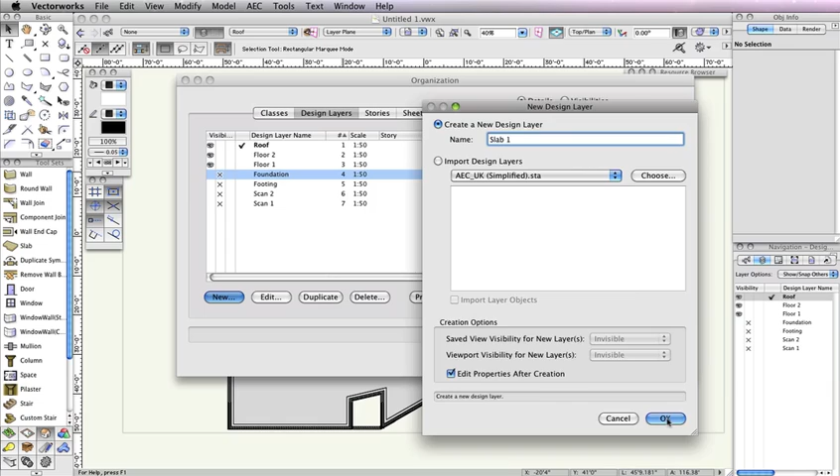Go to the Design Layers tab in the Organization dialog box and select Design Layer Foundation. Then click the New button. In the New Design Layer dialog box, name the design layer Slab 1. Check Edit Properties After Creation and click OK. In the Edit Design Layers dialog box, set the elevation and layer wall height fields to 0, then click OK to create the design layer.

You need to create one more design layer for the second floor slab. To do this, select Slab 1 and click the Duplicate button. This will create a new design layer, which you should name Slab 2, stacked directly below Slab 1. This slab should actually be stacked between Floor 1 and Floor 2.

To change the stacking order of the design layers, click and hold in the digit located to the right of the design layer name in the number column. Then drag your cursor upward until a bold horizontal line appears between Floor 1 and Floor 2. Now release your mouse button. As you can see, Slab 2 is now stacked between Floor 1 and Floor 2.

Aside from the stacking order, you also need to change the elevation height for Slab 2. So select the Slab 2 layer and click the Edit button. When the Edit Design Layers dialog appears, input 10 feet 8 inches in the elevation field and click OK.

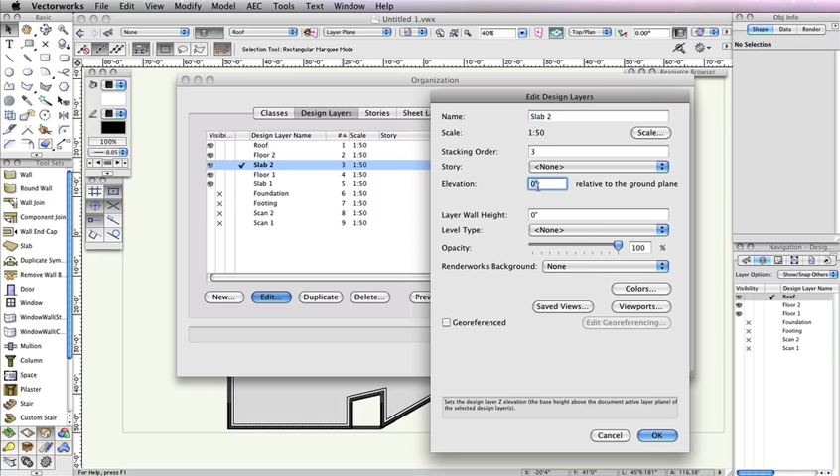Next, set Slab 1 to be the active design layer. Now make design layers Scan 1, Slab 1, and Floor 1 visible. All other layers should be set to invisible. Click OK to close the Organization dialog box. Finally, go to View, Layer Options, and choose Show Snap Others.

Now we're ready to begin drawing the slabs.

Just as you did with the roof objects, you'll first create the shape with basic 2D geometry and then convert it to a slab. To begin, go to the Attributes palette and select any shade of tan for the fill color. To do this, simply click on the color swatch below the paint bucket icon.

At the bottom of the color picker, select the Vectorworks Classic color palette, then select a color. Additionally, in the Attributes palette, click the Opacity button, which is just below the pen color swatch, and set the opacity slider to 50%.

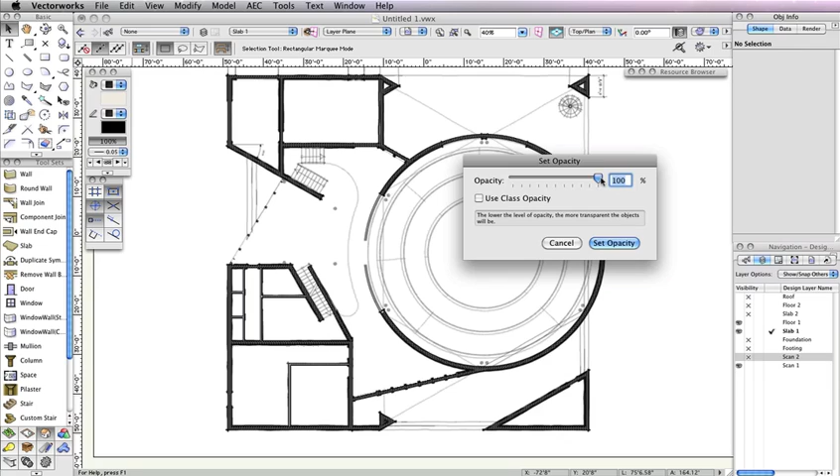Now select the Rectangle tool from the Basic Tool palette. Also choose the first mode, Rectangle mode, in the toolbar. After that, click at the top left corner of the building, where the horizontal and vertical walls meet. Then at the bottom right corner on the opposite end of the building, click once more to create the rectangle.

Notice you can still see the walls beneath the rectangle, since we set the opacity for this rectangle to 50%. You'll also notice that the rectangle extends past the building walls near the building entrance.

Let's take a second to fix this. Again, select the Rectangle tool in the Basic Tool palette, but this time choose the last mode. Now you'll need to use the scan of Floor 1 to snap to the point where the window wall at the entrance and the horizontal wall below that window wall meet.

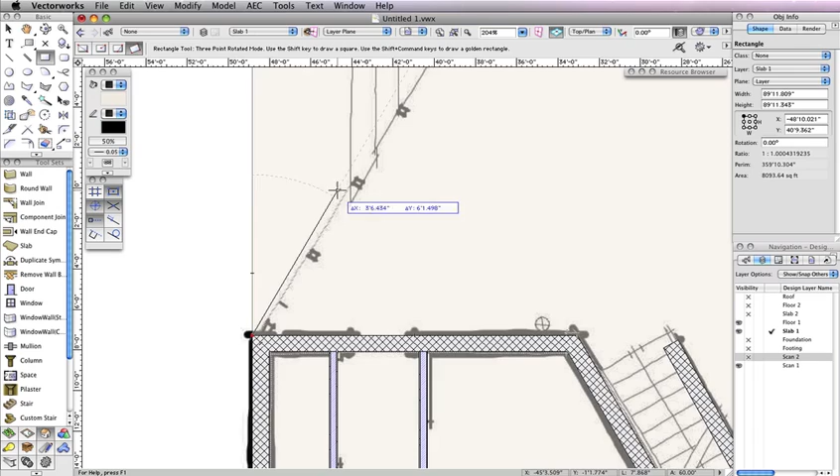After locating this point, click to set the first point of the rectangle. The second mouse click will set the rectangle's angle. So move your cursor upward and slightly to the right until you reach the angled wall above. When you see the cursor cue Object/Perpendicular, click once to set the angle.

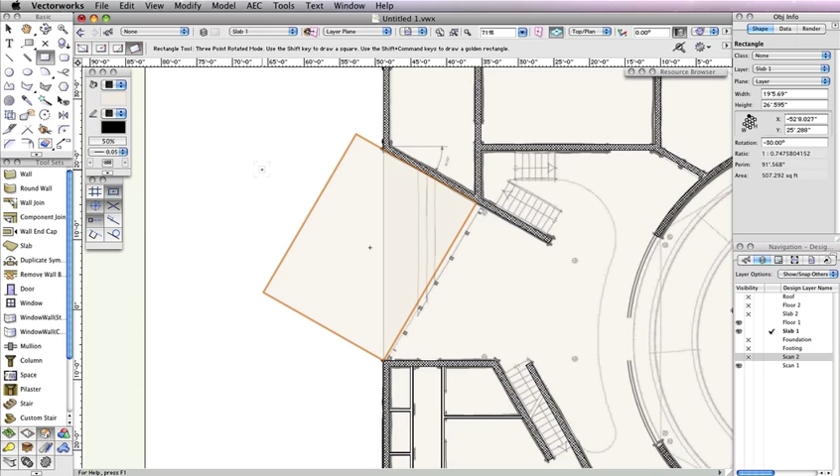With the last click, you'll set the rectangle's width. So move your cursor to the left until you have passed the leftmost vertical wall of the building, then click to create the rectangle. You can use this newly created rectangle to clip a section from the larger rectangle you previously drew.

Hold the Shift key, and with the Selection tool, select both rectangles. Next, go to Modify, Clip Surface.

Initially, it might seem as if nothing happened, but if you press the Delete key to remove the small rectangle, you'll see that the clip was successfully completed.

Additionally, if you select the larger rectangle, you'll notice in the Object Info palette that the object has been changed to a polygon. You'll also need to clip the area inside of the round walls from the existing polygon.

To do this, select the Circle tool from the basic tool palette, and make sure the first mode, Circle by Radius mode, is enabled in the toolbar. Then, to start the circle, click at the center of the round walls when the cursor cue Arc Center appears. To complete the circle, click anywhere on the inside face of the round wall.

Next, with the Selection tool, select both the circle and the remaining polygon.

This time, right-click the circle and select Clip Surface from the context menu. Since the selection state has changed, only the circle is selected. Press the Delete key to remove the circle. As you can see, the proper clip has been created.

We're almost done creating the slab. Now we need to clip a few more extraneous areas before we can complete the polygon that will be used for the slab. This time, we'll use the Clip tool as a different approach to clipping objects.

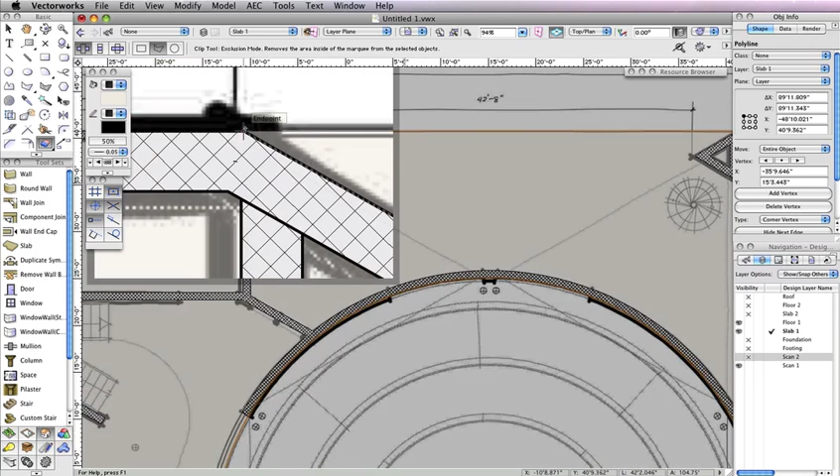There are only 3 vertex points along the inside face of the walls that need to be exact for the clipping boundary you are creating. Please click on these points in the same order as shown. Then, for the remainder of this polygon, simply set the points as close to the same area in your own drawing as possible.

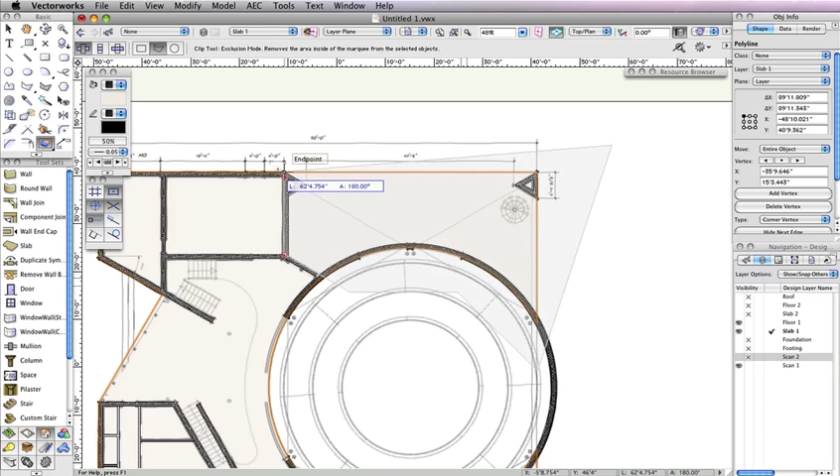The last click to create the clipping boundary will be the same as the starting point. Once the last point is set, the polygon will be clipped according to the shape you just drew.

Let's use the Clip tool once more to clip this bottom portion of the polygon. Again, just follow the order used here to set your own points for the clipping boundary.

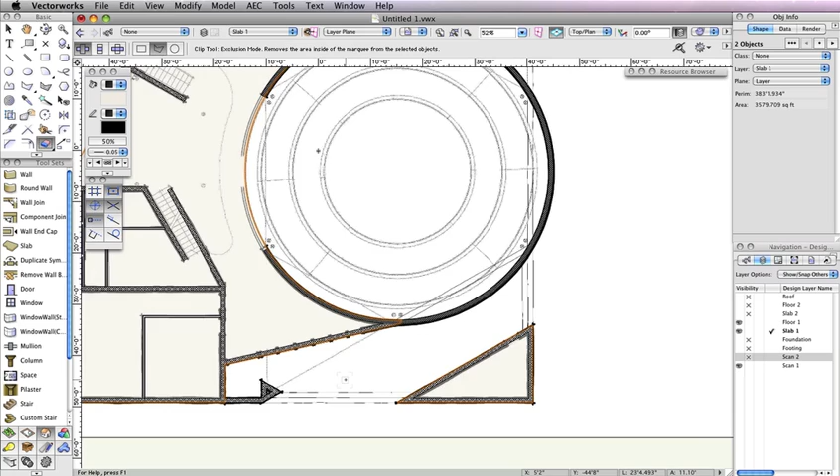Remember that only the points along the walls need to be exact. The rest of the points need only be relatively close to the area shown here. Just as last time, your start and end points should be the same point. Once we've completed it again, the polygon will be clipped accordingly.

Notice in the Object Info palette, because of the way the polygon was clipped, there are 2 polygons instead of 1 now. Now you're ready to convert these polygons into a floor.

To start, switch to the Selection tool. Select the larger of the 2 polygons and go to AEC, Floor. In the Create Floor dialog box, set the bottom Z field to -12 inches and the thickness field to 12 inches. Then click OK to create the floor.

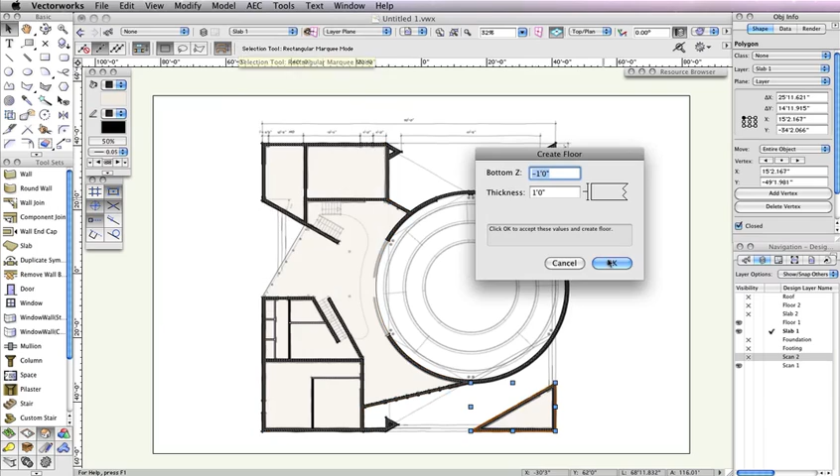Notice in the Object Info palette that the object is now a floor. Next, you'll select the smaller polygon and again go to AEC, Floor. Use the same parameters as before and simply click OK to create the object.

Creating the lecture hall slab. The last portion of the slab that you need to create for this floor is the auditorium or lecture hall. Here's what that floor in this section looks like.

Each level is 1 foot 6 inches higher than the level before it. This is so the people on each level can see the presenter or lecturer in the center of the floor. Therefore, instead of using the floor command as we did before, we'll create a sweep, since this portion of the floor is cylindrical. To create a sweep, you must first make a profile shape that will sweep around our defined axis point.

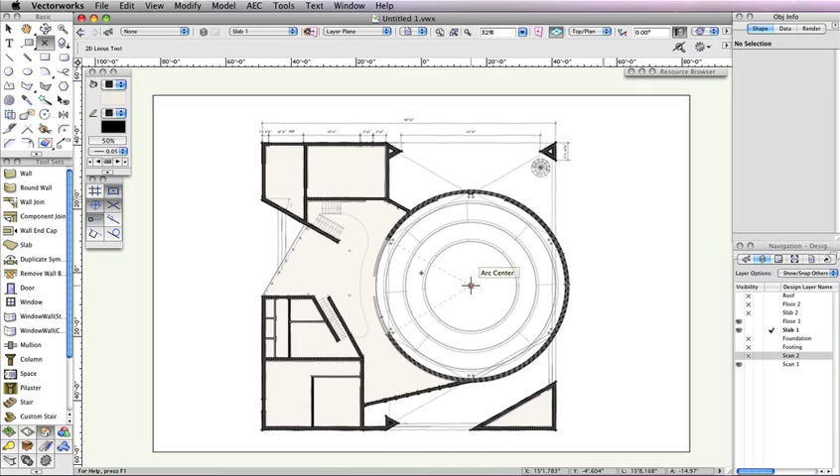Additionally, to make things easier, we'll use Floor 1 Scan as a reference to create guidelines before we perform the sweep. First, select the 2D Locus tool from the basic tool palette. Now, click at the center of the existing round wall, then the cursor cue Arc Center appears. After setting the locus point, zoom into view so that you can see the detail in the Floor 1 Scan in the auditorium. Pan if necessary so that the locus point is on the left side of your drawing area.

Next, go back to the basic tool palette and select the Line tool. Then click to set the first point of the line when the cursor cue Arc Center appears. Hold the Shift key and move your cursor to the right. Once the cursor cue Horizontal appears and your line is extended past the round wall, click again to create the line. With the line still selected, go to Modify, Guides, Make Guide.

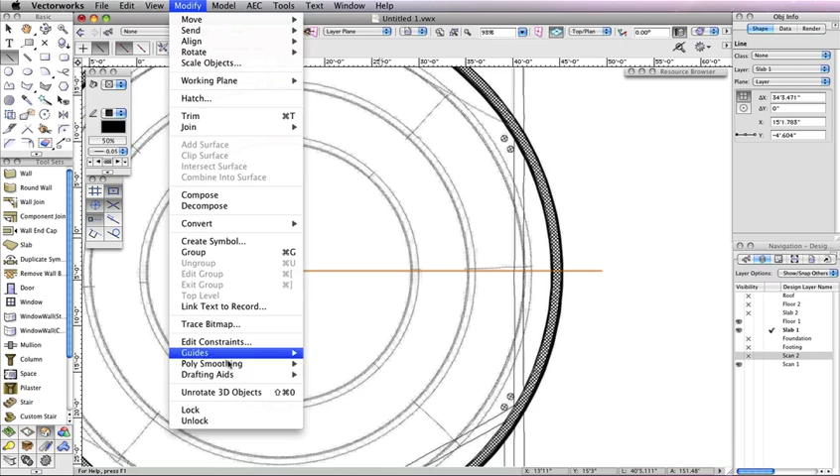Notice the line style has changed to a purple dashed line, which is the line style used by default for guides. Furthermore, the selection highlighting has changed to gray. The gray highlighting means your selected object is locked, which you can also see in the Object Info palette. Also in the Object Info palette, notice the line's class has changed from the None class to the Guides class, which is automatically created the first time the Make Guide command is used.

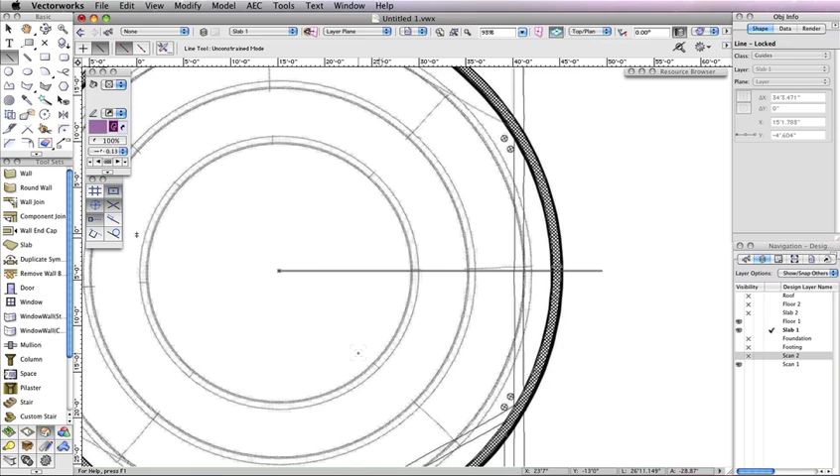Now we need to create duplicates of this guide, with a spacing of 1 foot 6 inches between each guide. For this, select the Move by Points tool in the Basic Tool palette. Also enable Move Mode and Object Retention Mode in the toolbar, and set the Number of Duplicates field to 3.

The line you drew earlier should still be selected, but if it's not, hold the Command key on a Macintosh or the Control key on Windows to temporarily enable the selection tool. Select the line and then release the Command or Control key.

After that, click on the existing locus point when the locus or endpoint cursor cue appears, and press the Tab key to enter the length field on the floating data bar. Input 1 foot 6 inches and press the Enter key to lock in the value. Then hold the Shift key and move your cursor upward.

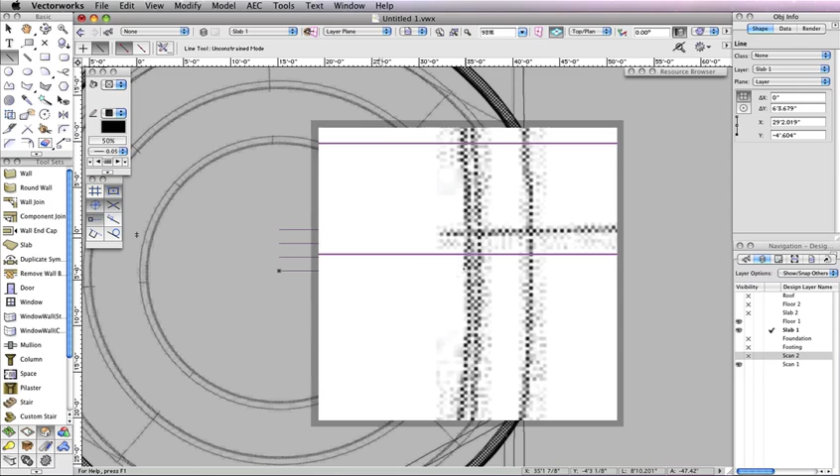When the cursor cue vertical length appears, click to create the duplicate guides with this spacing. Next, switch back to the Line tool in the Basic Tool palette. Draw a vertical line from the point where the first row of seating in the scan layer and the bottommost horizontal guide line meet. Remember that the scan layer does not have any snapping points, so use the snap loupe to set the most accurate point as possible.

Do the same thing for the remaining 3 rows of the scan layer. Lastly, select all 4 of the vertical lines, and again go to Modify, Guides, Make Guide. Creating the guides in this way will make it easier to create the sweep profile to ensure it will match the floor scan. With the guides completed, it's time to move on to creating the actual lecture hall floor with the use of the sweep command.

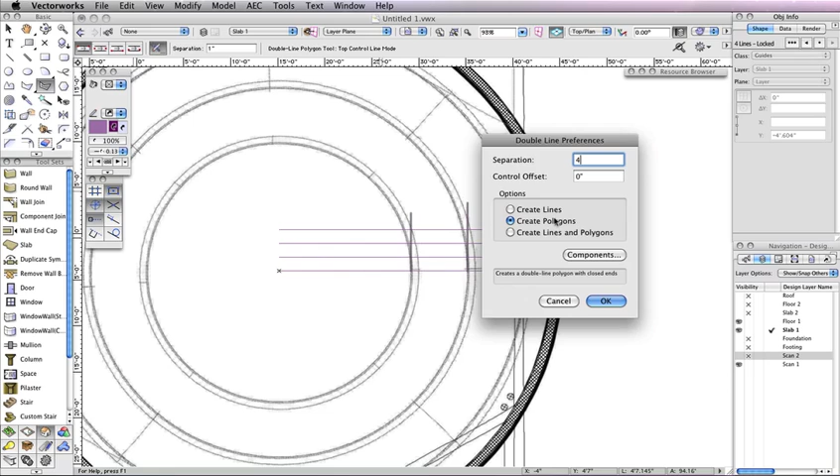To begin, you'll need to create the sweep profile. To do this, select the Double-Line Polygon tool from the Basic Tool palette and click the Preferences button in the toolbar. From the Double Line Preferences dialog box, set the separation between the 2 lines to 4 inches. In addition, choose Create Polygons from the Options section and click OK to return to the drawing.

To create the double polygon using the existing guidelines, click on the following snapping points in the same order as shown here. On the last point on the wall, double-click to finish the polygon. Notice that a closed polygon is created after you double-click.

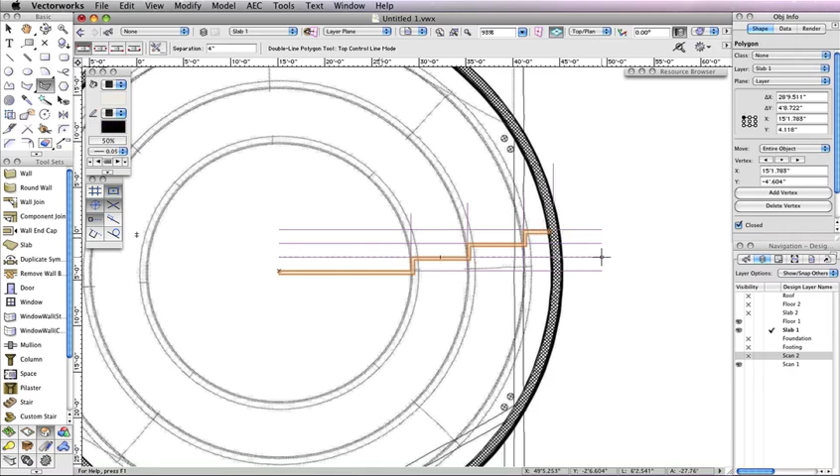Now, set design layers Floor 1 and Scan 1 to invisible so you can get a better look at the polygon. Also change the Plane drop-down menu in the Object Info palette to Screen.

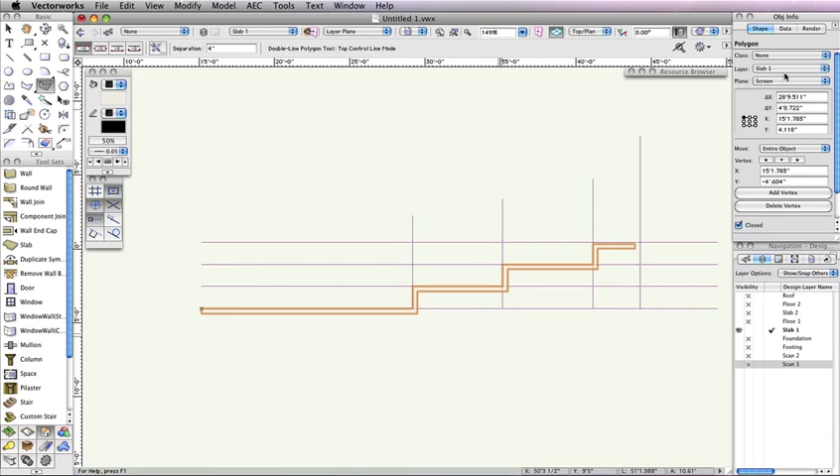You should notice each level of this polygon is representative of levels or steps of the lecture hall floor. The last thing we need to do is angle these steps to represent the angle of repose you would see in a real-world situation. With the polygon selected, switch to the Reshape tool in the Basic Tool palette and make sure Move Polygon Handles mode is enabled in the toolbar.

Next, click this vertex point. Then press the Tab key to enter the length field in the floating data bar. Enter a value of 8 inches and press Enter to lock in the value. Now hold the Shift key and move slightly to the right. Once the cursor cue horizontal length appears, click.

Repeat this process with these remaining vertex points. Here's what you should have once completed.

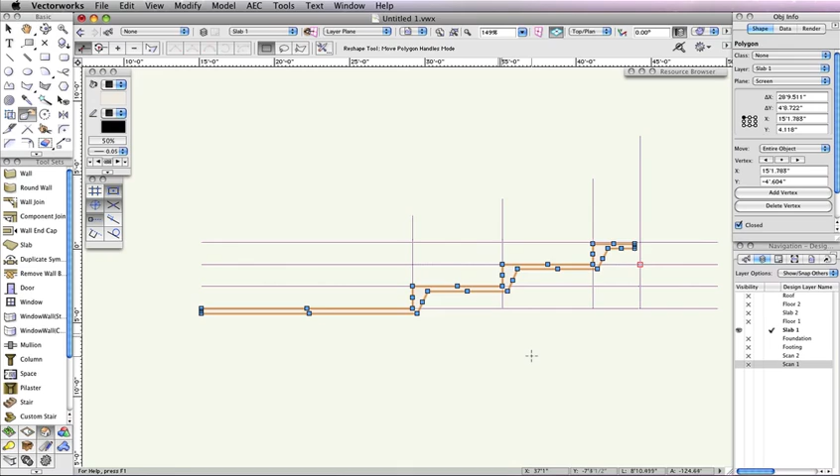The sweep profile is complete, so you no longer need these guides. To delete them quickly, switch to the Select Similar tool in the Basic Tool palette. Then select any of the guides and the rest will be selected as well. If you were to press the Delete key right now, none of the selected guides would be deleted because they're locked.

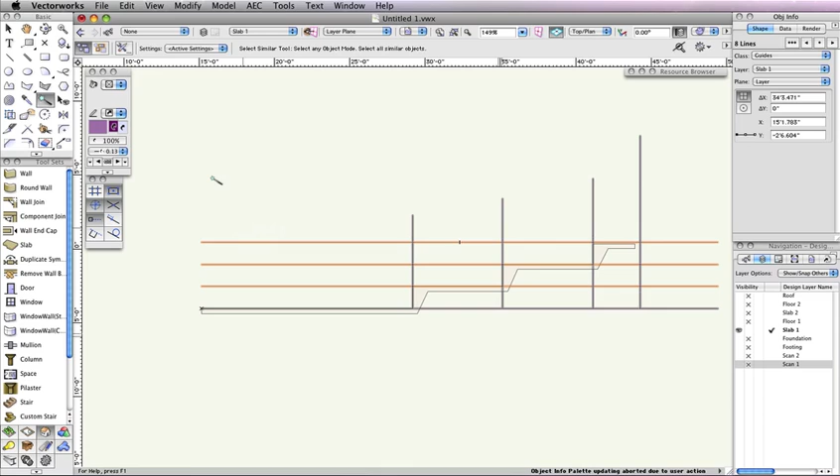To unlock the lines, go to Modify, Unlock. After unlocking, you can press the Delete key to remove these guides. You can delete the locus point too.

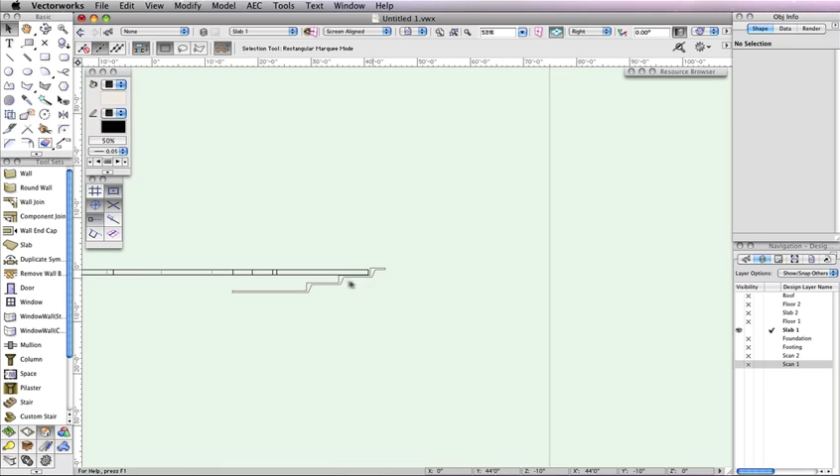Next, let's switch to a right view. Then select the polygon and go to Modify, Move, Move. In the Move Selection dialog box, choose Cartesian and set the X offset to -4 inches and the Y offset field to 0. Press OK to move the polygon accordingly.

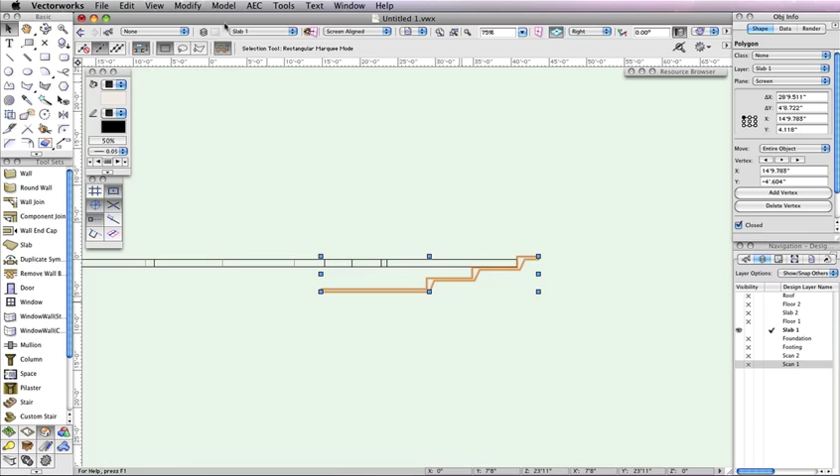Now go to Model, Sweep. Since you want the selected polygon to make a complete 360 with no additional pitch, you can leave all of the parameters at their defaults and click OK to create the sweep.

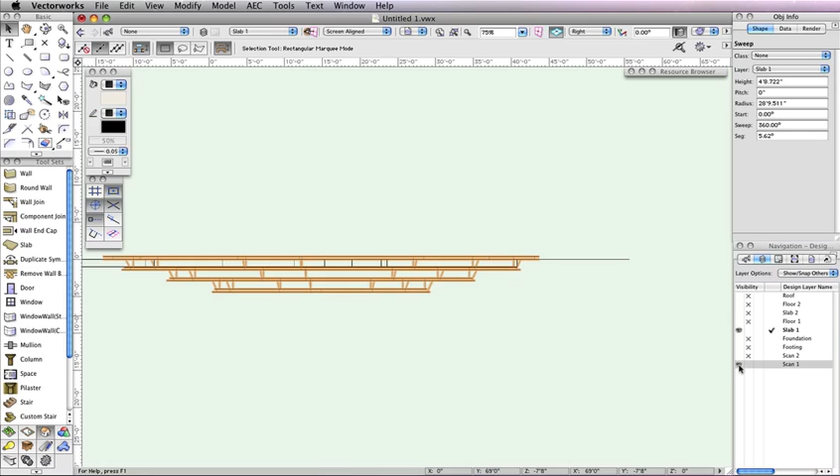In the navigation palette, set the Scan 1 and Floor 1 design layers back to visible. Also, return to a top plan view. When you switch back to top plan, you may see the sweep is not in the correct location. To fix this, just select the sweep and drag it by its center point in the middle of the existing round wall. When the cursor cue Arc Center appears, release your mouse button and move the sweep to that location.

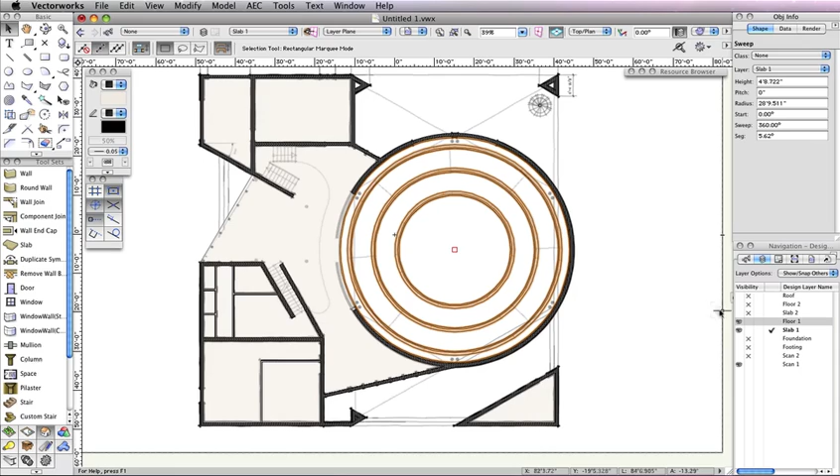That's it for the first floor slabs. You can set design layers Floor 1 and Scan 1 to invisible, render in OpenGL, and use the flyover tool to see what you've got so far. Once you're done, return to a top plan view.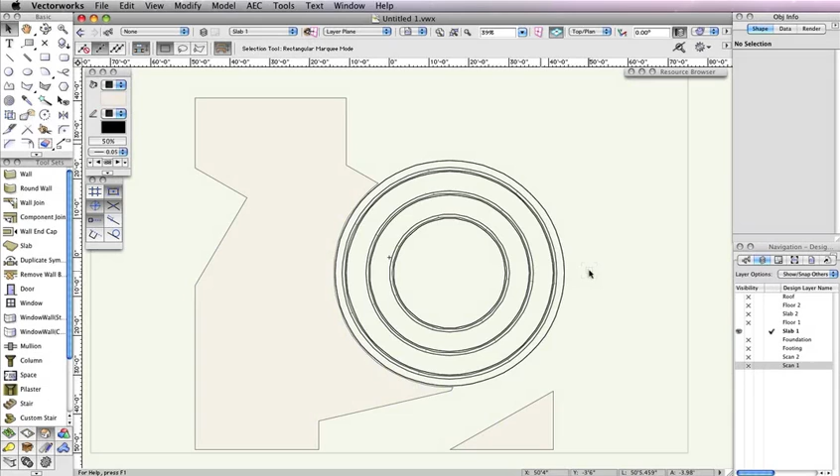The first floor slab is done, so we'll continue on with creating the second floor slab. In the navigation palette, set design layers Slab 2, Floor 2, and Scan 2 to be the only visible layers, and make Slab 2 the active layer.

Just as with the first floor, much of the slab creation will rely on the existing walls, but this time the walls we use as reference will be from Floor 2. There's only a small section that doesn't have existing geometry to reference, and that's this area, which is actually a balcony with a handrail. So let's start by drawing the handrail shape first.

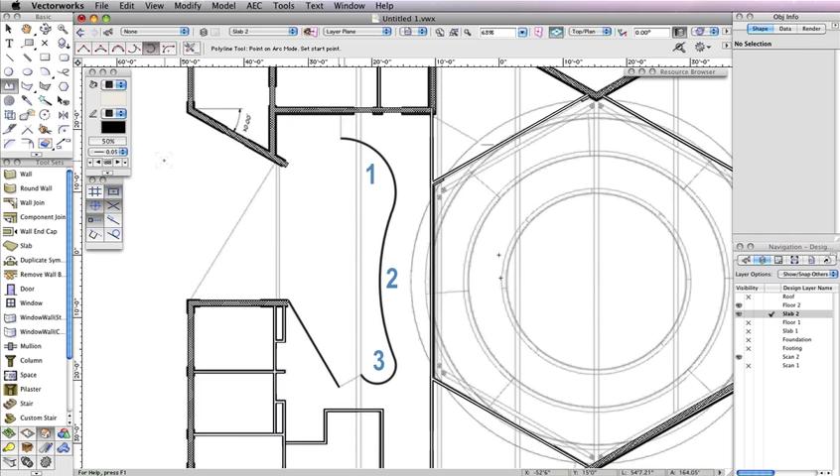To create this curved handrail shape, you'll need to use the Polyline tool in Point on Arc mode. Select this tool from the basic tool palette, and also select the correct mode in the toolbar. Take a look at this curve - you can see it's composed of 3 arcs. With the Polyline tool in this mode, you can draw all 3 composed arcs in one shot instead of having to trace each arc separately and then snap to the endpoints to compose them.

To begin, click on the topmost endpoint of this curved shape. Next, click anywhere along the current arc. Then click somewhere near the endpoint of the current arc, which will also be the start point of the next arc in the shape. Use the scan as a reference for the best place to set this point, based on the curve of the arc.

Now you can move on to the second arc in the shape. Again, you've already set the start point, so the next click can be anywhere along the arc. Then the last click defines this arc's endpoint and the next arc's start point. Once more, click anywhere along the last arc, and double-click at the arc's endpoint to create the polyline. There, you've created the handrail profile in just a few short clicks.

You can now switch to the Polygon tool in the basic tool palette to finish creating the rest of the floor profile. Also enable the first mode, Polygon from Vertices mode. Click at the topmost endpoint of the polyline you just created, and hold the Shift key while moving your cursor upward. Then double-click on the inside face of the first wall you reach.

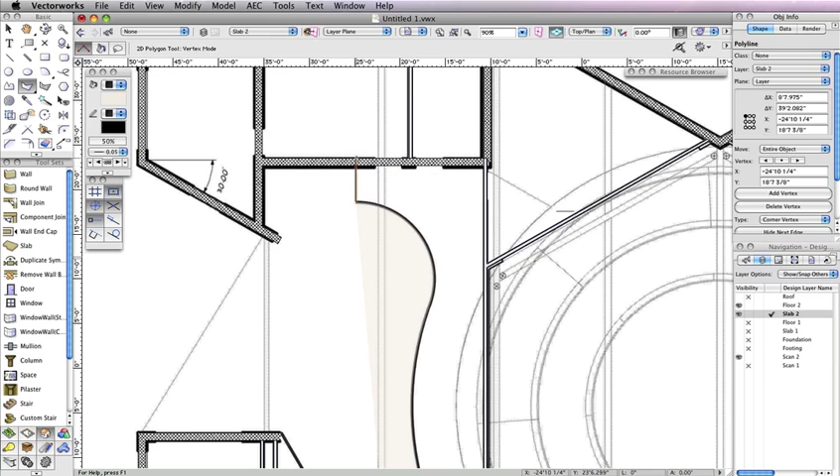With the Polygon tool still active, click on the bottommost endpoint of the curved polygon, and then follow the straight line that is connected to the curve in the scan layer. After the cursor cue of 30 degrees appears, click somewhere near the endpoint of the line to match the scanned layer. Now double-click the inside endpoint of the wall located to the top left of your current point.

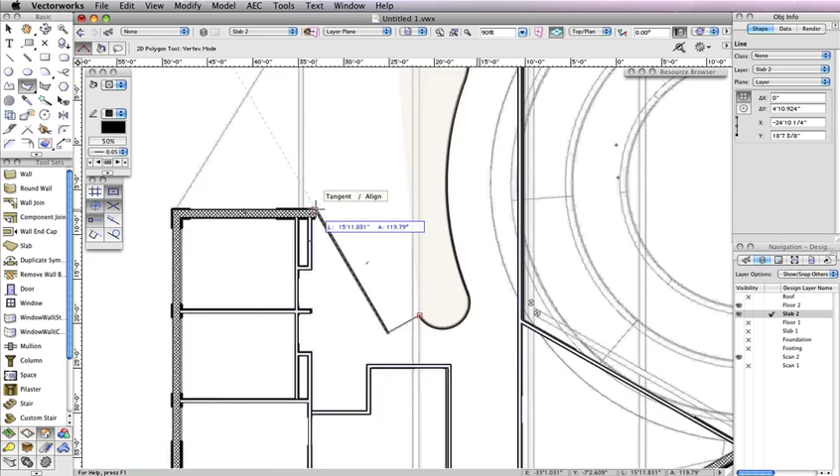Next, press the X key to switch to the Selection tool. Select the curved polyline and the 2 polygons we just created, and go to Modify, Compose. The object should be composed into one polyline, as reflected in the Object Info palette.

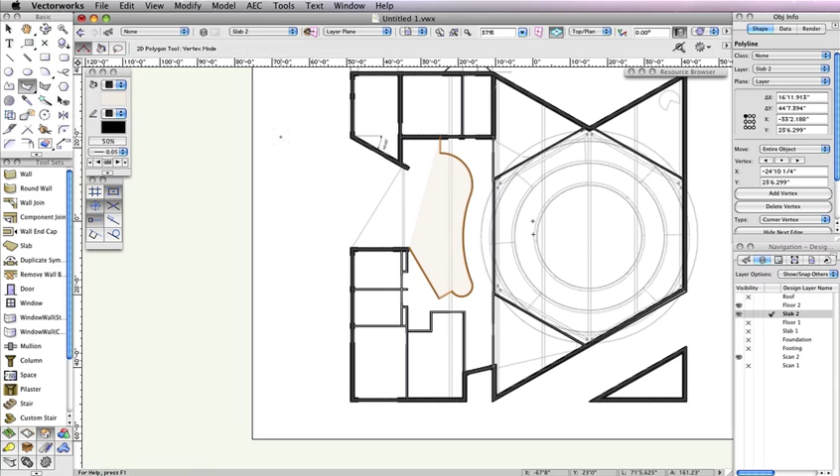At this point, you can switch back to the Polygon tool in the basic tool palette. Enable Vertex mode if it's not already active in the toolbar. The remainder of the vertices should be relatively quick to create, as they are snappable points from the inside face of the walls from the second floor. For that reason, you can set the design layer Scan 2 to invisible in the navigation palette. Furthermore, please set your vertex points to the same location and in the same order as shown here.

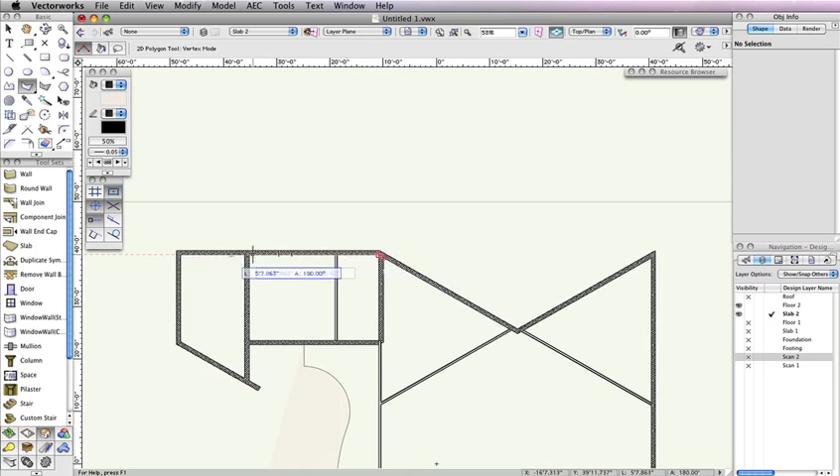Don't forget to double-click your endpoint to complete the polygon. Switch back to the Selection tool. Hold the B key to enable X-ray select. Select your newly drawn polygon and the curved polyline, and then again go to Modify, Compose, to convert these two objects into one large polyline.

As you can see, this is only a portion of the remaining slab. So again, enable the Polygon tool in the Basic Tool palette, and follow the vertex points set in this video, and set these same points in your file. Just like last time, don't forget to double-click to complete the polygon.

The last portion of the slab you need to create is in the bottom right corner. It's also the easiest to create. Temporarily make Floor 2 the active layer in the navigation palette. Then simply enable Inner Boundary mode in the toolbar and click inside these 3 walls, and the polygon will immediately be created. With the polygon selected, change the Layer drop-down menu in the Object Info palette to Slab 2, and make Slab 2 the active design layer once again.

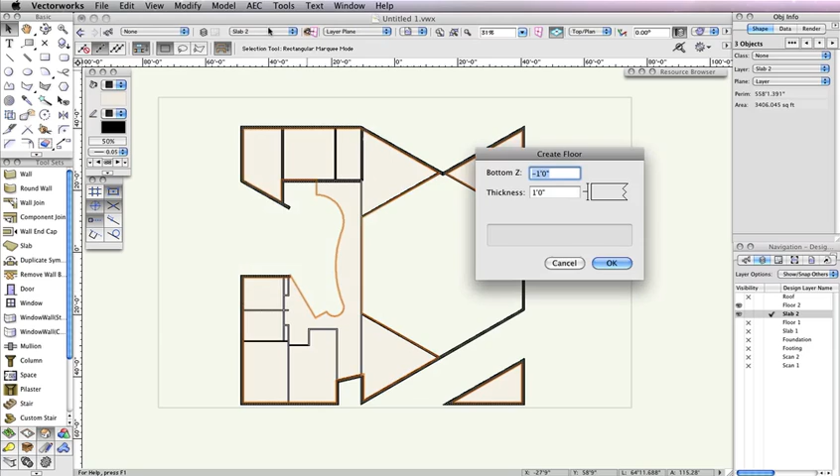Now all of the profile shapes needed to create the floor are complete. The last step is to convert these objects into a floor. Press the X key to activate the Selection tool and select the polyline and the 2 polygons. Then go to AEC, Floor, in the Create Floor dialog box, set the bottom Z field to -1 foot and the thickness field to 1 foot. Lastly, click OK to create the floor.

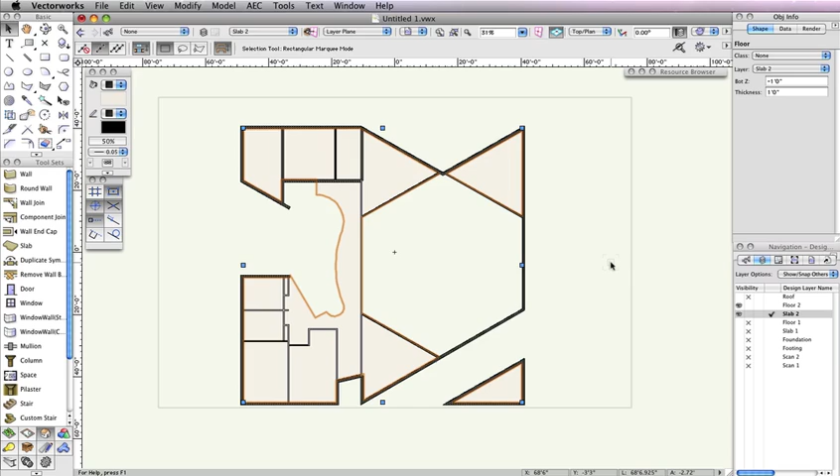Notice in the Object Info palette that only one floor object was created, even though multiple 2D objects were used in its creation. At this point, you've created all the slabs, walls, and roofs for this building. Take a second to set all the design layers to visible, except for the scan layers. Switch to a right isometric view, and render in OpenGL to see your progress.

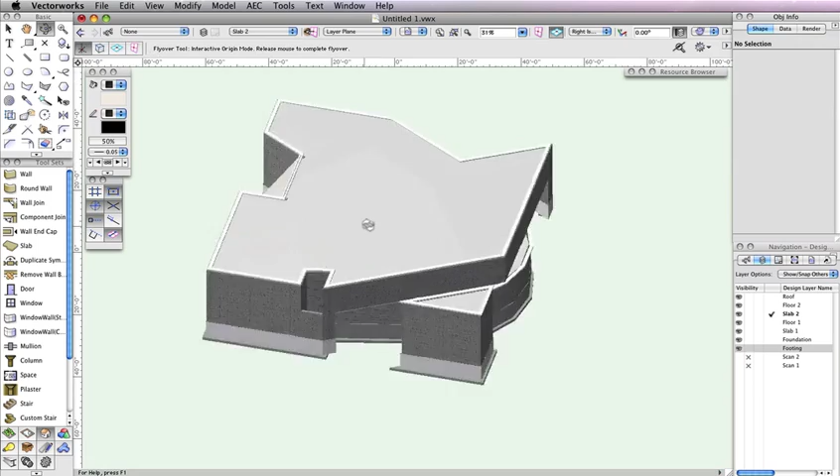Feel free to use the flyover tool as well to see more angles of your building. As always, once you've finished, return to a top plan view.